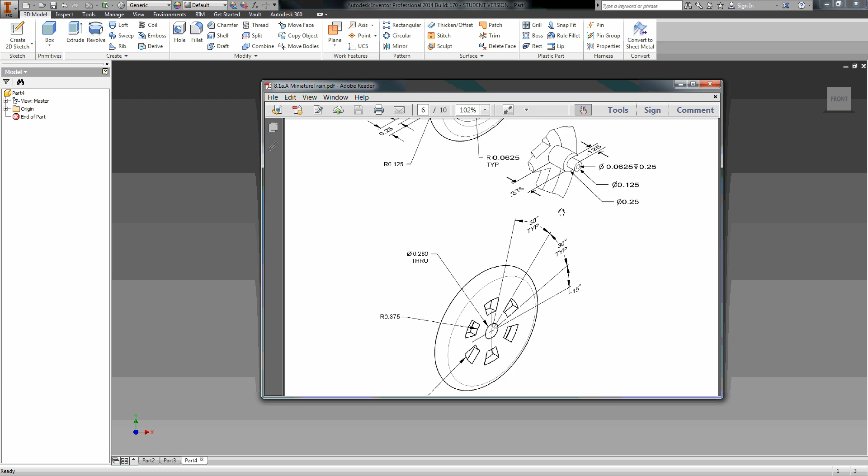Okay, in this video I'm going to show you how to make the wheel for the train, and I'm going to actually break this up into 3 parts. I'm going to show you how to make the overall shape, then I'm going to show you how to make the holes here in the back in a different part, and then I'm going to show you how to make this linkage peg right here, and that way it'll be in 3 different videos and it won't be so big.

So first things first, I want to make this wheel, and again, it's a revolve shape. Some people like to make the disc and then try to extrude in and stuff like that. It'd be a whole lot easier if we just made this shape right here. Now what I'm going to do is imagine that the hole was not there. I'm going to build it without the hole being there, and then I'm going to punch the hole through later.

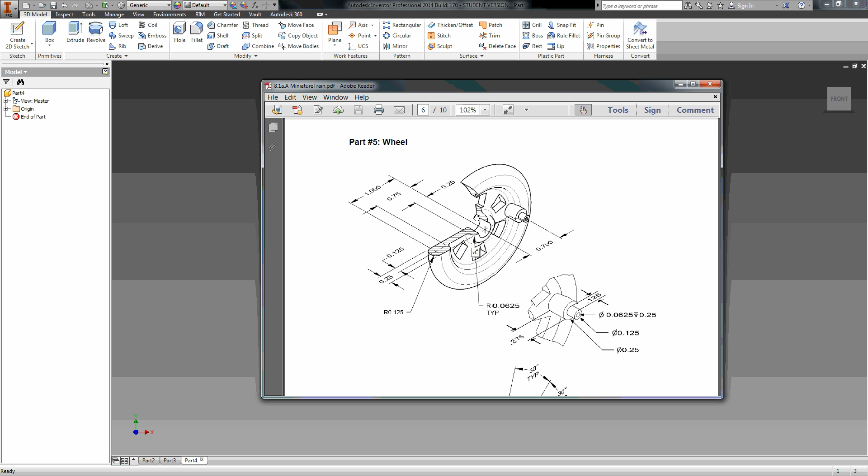And if you look, everything is based off of where the center of this is going to be. So I'm going to build this overall shape. I'm going to add this little semicircle here at the end, and then I'm going to add these little fillets, and then I'm going to revolve it and punch the hole out. All right, so I'm going to go ahead and build the general shape first.

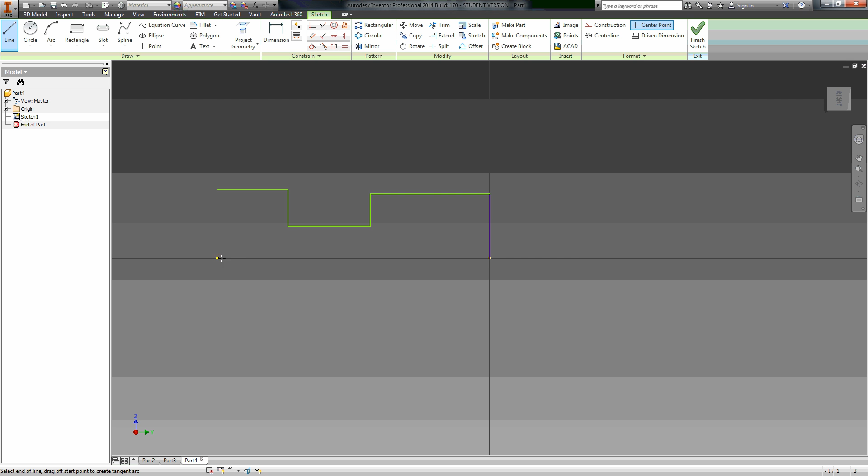So I'm going to go ahead and create a sketch. I'm going to take a line tool, and I'm just going to, well, that wasn't good. Try it again. All right, I'm going to start here at the origin, go straight up, over, down, over, back up, over, down, and then back over. This is the general overall shape of this thing.

So now if we look at this, from the center to this edge right here is 0.25. From the center to this edge is 0.75. And from the center to the center of this little semicircle is 1, which is going to be on this edge over here. So 0.25, 0.75, and 1. So I'm going to go ahead and dimension from here to here. It's 0.25. Got a dimension from here to here. It's 0.75. Oh, look at that.

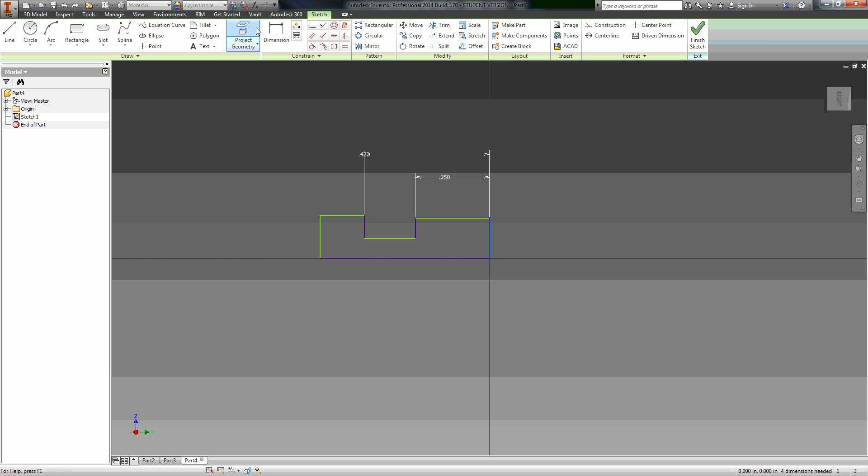So remember I told you in one of the earlier videos, I should have done the overall dimension first. So I'm going to undo that. I'm going to dimension from here to here and make it 1. Now I'll come back and fix this one and make it 0.75. All right, so there's my general overall shape in the X direction. Now I need to fix it going this way.

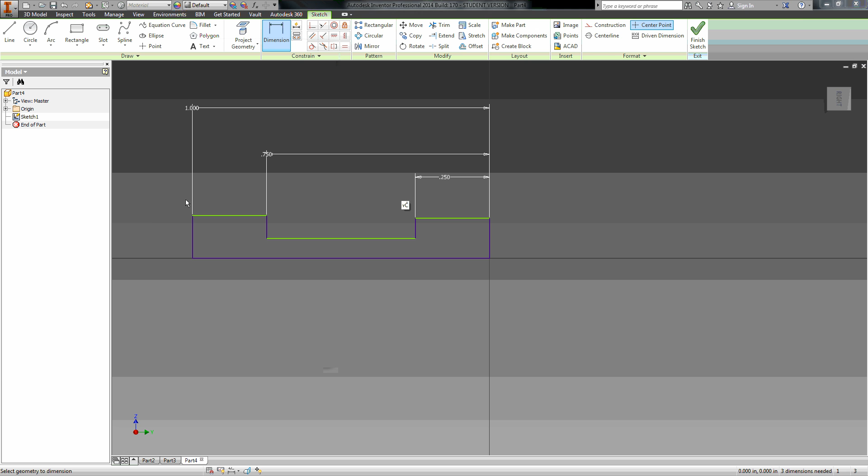And if you look at the picture, it shows you from here to here is 0.25, but from here to the center of the circle or to this edge right here is 0.125. So let's go ahead and dimension those. So this is 0.25, and from here to here it's 0.125. All right. And then this guy right here, I can make these collinear. I'm going to click on this and make this one and this one collinear. It keeps them both at 0.25 for me. All right, so there's that overall shape that I need.

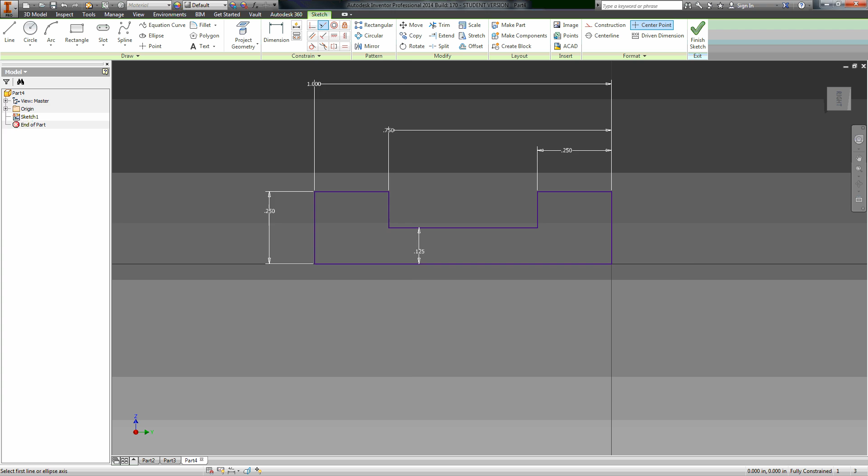Now we said that I needed a semicircle on the end. And if you look, it tells you there's an arc right here of 0.125. Rather than do a fillet, it's easier to do a semicircle because you can see there's the center of the circle right there, which is located right on this line, which is 0.125. So all I have to do is take a circle right here, find that midpoint, there it is, drag my circle up to the edge, there it is. My diameter is 0.25, therefore my radius is 0.125.

Now I'm going to come in here and trim this out. I'm going to trim this piece out, but it won't let me trim this bottom one out. Watch when I try to. It's going to yell at me because there's a dimension tied to it. So I'm going to go ahead and leave it there. It's not going to affect anything. So there's that shape that I need. All I have left to do are my little fillets right here, and then revolve this thing around.

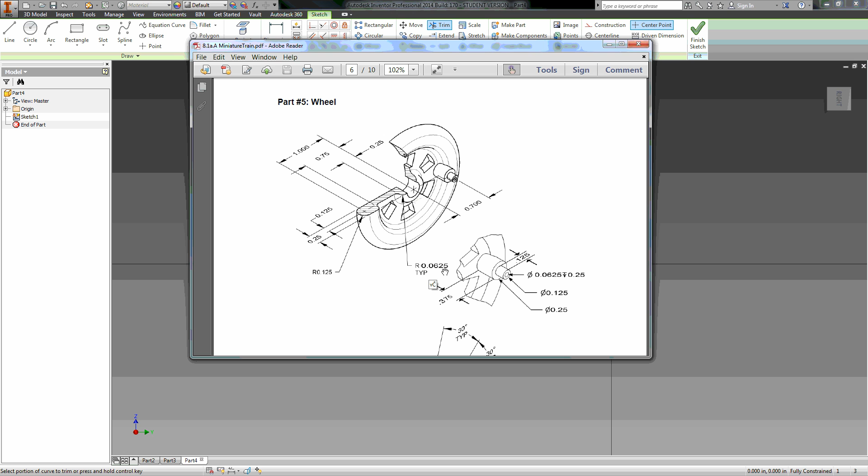And if you look, it tells you that your fillets are 0.0625 typical, which means all 4 of these are the same. So I'm going to come over here and do my fillet and set it to 0.0625. Click on this edge, then this edge. There's the first one. This edge, then this edge. There's the second one. This one, there's the third one. This one and this one, there's the fourth one. My fillets are done. I am ready to revolve.

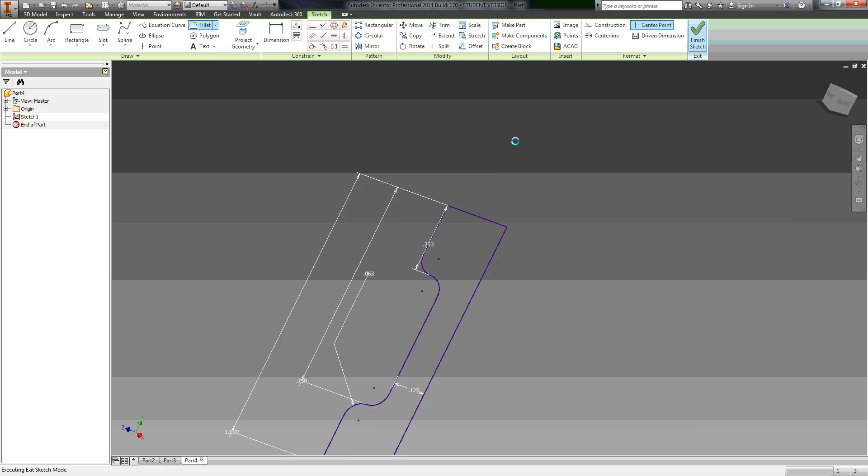I'm going to go ahead and hit revolve. There we go, select that region, hit my axis, hit that right there, and there's my revolve. Now all I have left to do is punch a hole through the center, so I'm going to make a new sketch, drop my point right here, finish my sketch, and I'm going to do a hole.

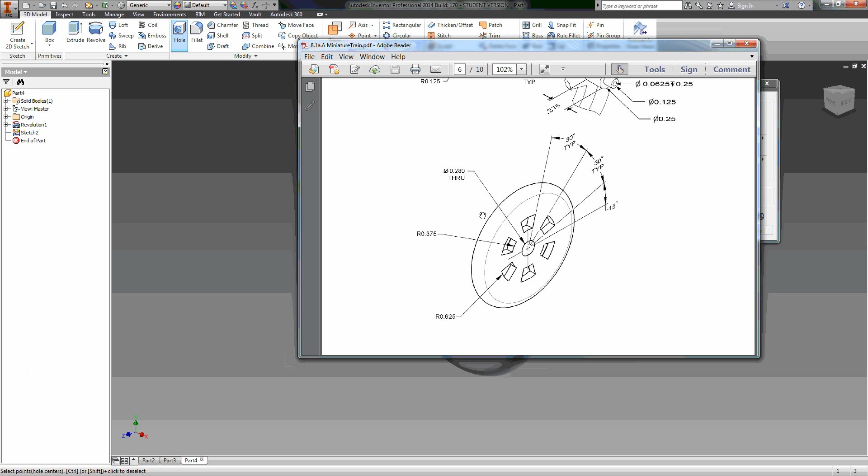And the size of the hole is in the bottom sketch down here. The size of the hole is 0.280 through, so I'm going to go ahead and make it 0.280. And it was supposed to go all the way through. Hit OK, and there's that shape.

In the next video, I'm going to show you how to put the cutouts on the back, and in the next video, I'm going to show you how to put that little peg right here in the front.